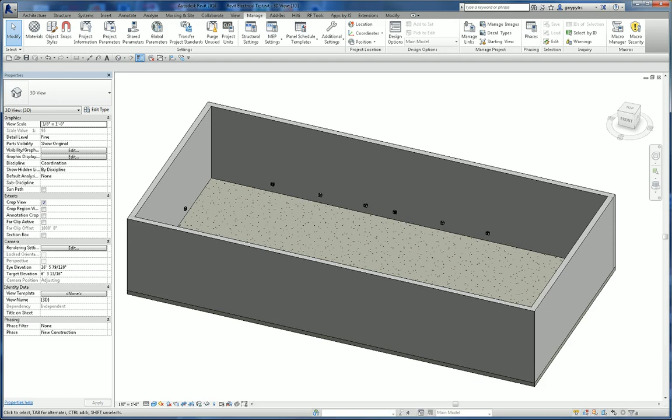We're in Revit 2014 investigating some issues with the electrical wiring. What we have here is basic 4 walls and a floor with a few outlets. Here we can see that this is an L630R, which is a 208 outlet, and here is a quadplex, which is a 120 volt outlet.

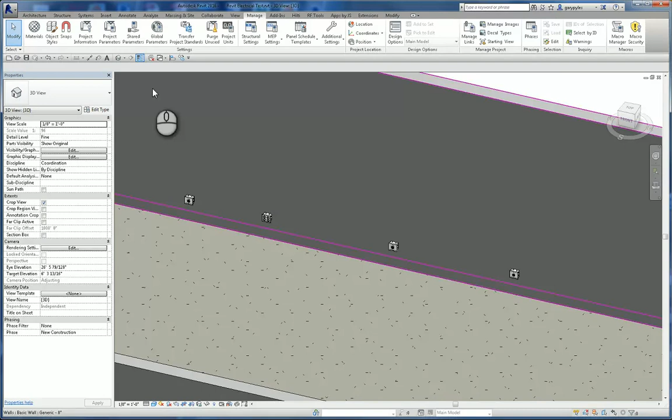Let's look at these in a plan view. So here we can see a bunch of outlets on the wall. Again, there's our L630R, a couple of them, and then our quadplex. We also have a panel already installed with the distribution system, PP1.

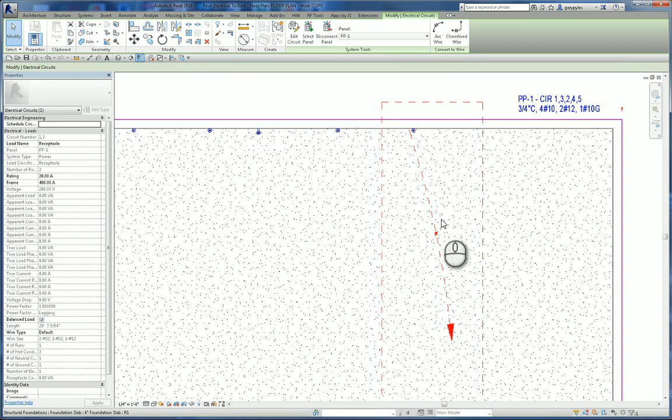So the first thing we're going to do is from this outlet generate a circuit. And one of the problems we can see right off the bat is, for some reason, this outlet does not have the right voltage amperage to it.

So we basically just have to tab on this till we get the circuit, and then we can change the rating over here from 20 to 30. This is important because it's going to change the wire size as well. You can see everything went to number 10s here.

The one thing is, you can see right here in the wire size, which gets picked up by the label, that it's added a neutral, even though this is a balanced load and it doesn't require a neutral. And this is where the big issue comes in.

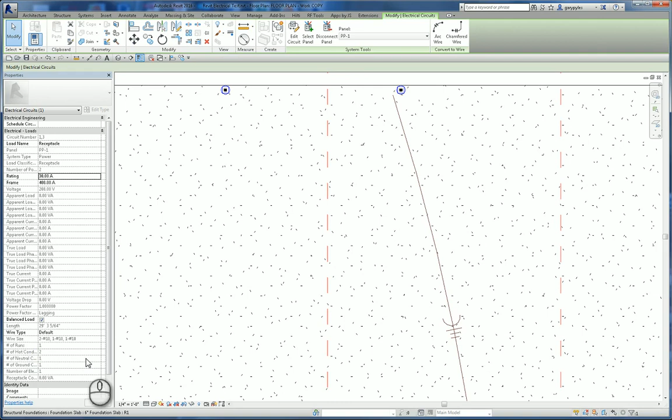Maybe if we come back into here and just select the electrical wire itself, I can adjust the number of neutrals in there and get it down to 0.

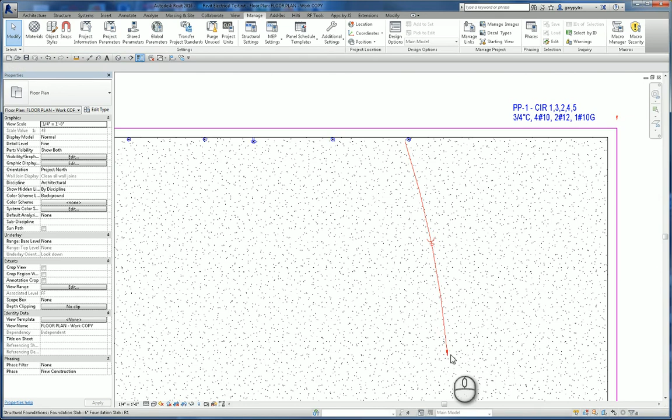So that's actually a fix to one of the problems that I was having. And here we can see that it puts in the home run arrow, which works out. Not sure why these whips never really connect where you want them to. I'm not sure if there's a way to correct that or not.

So here we have a single circuit, which seems to be working out okay, and we'll go ahead and tag that. I've got a free end here, so I'm going to do that and drag it off.

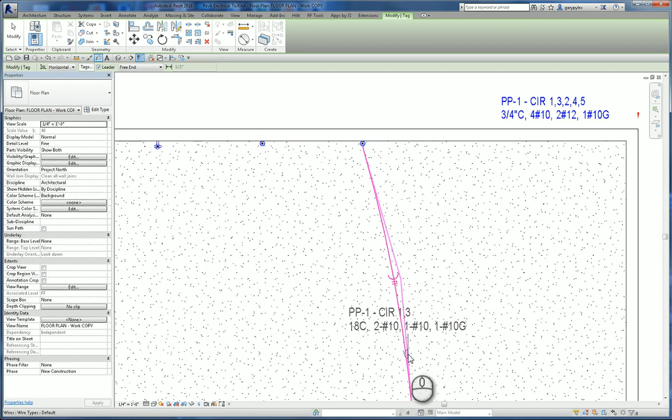This is a custom electrical tag that I built. If we want to look at it, let's go into edit the family real quick, select it, and edit the label. So at first we can see it picks up the panel name, puts a dash in, and then the circuit numbers, which it pulls out, and it's basically the same information that's carried over from the circuit into the panel schedules. We get a break to a next line.

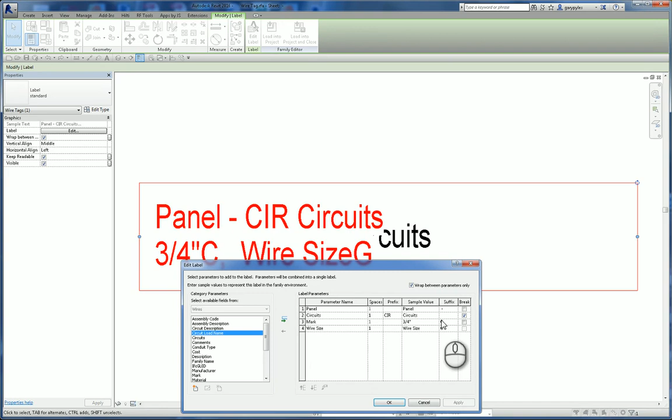Then this mark, we use this to actually control entering the size of the conduit, and I'll show you where that gets entered in a second. The letter C for conduit and a comma, and then lastly the wire size that it picks up right out of the wire size. And since the last entry is always the ground, we put a G on there for the ground. We'll go ahead and close that without any changes.

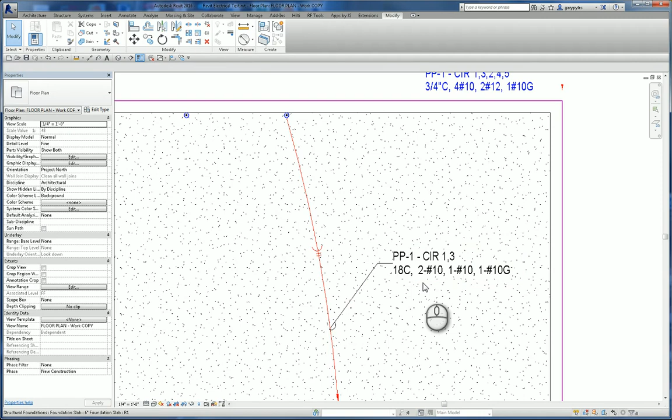And we're back in. So you can see how it's picked this up here. Power panel 1, circuits 1 and 3, which this does require 2 breaker positions, a double breaker. 18C, so we're going to click on there and then go over to the mark and change that to 3/4 inch, and boom, so now it goes back to 3/4 inch conduit.

So here we have 2 number 10 hots, 1 number 10 neutral, and 1 number 10 ground. Well, that's not right. We just told it that there's not 1 number 10 neutral. Here it's showing up that it is 1 number 10 ground here, or that there's 1 number 10 neutral in here. But up here, where we've just dialed it down to 0, it's not affecting this. Not sure why.

Oh, what about if I put that up to 4? Now that increases that. We can increase or decrease that to less than 0, but it doesn't change.

So let's look at the MEP settings. Go into Manage, MEP Settings, Electrical Settings, go over to Wiring, down to Wiring Types, and then we'll click Neutral Required, check it off, and say OK.

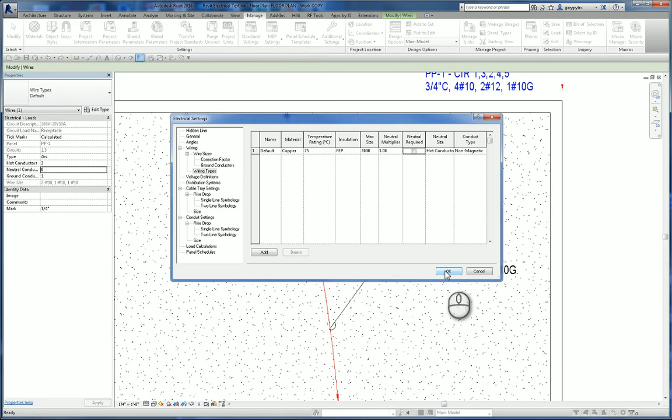So now our wiring has gotten really screwy. Let's check to see what happens here again. It just says 2 number 10s. Well, we know that's not right either. The tick marks are right. That's not. It says neutral conductors -1, which I find interesting.

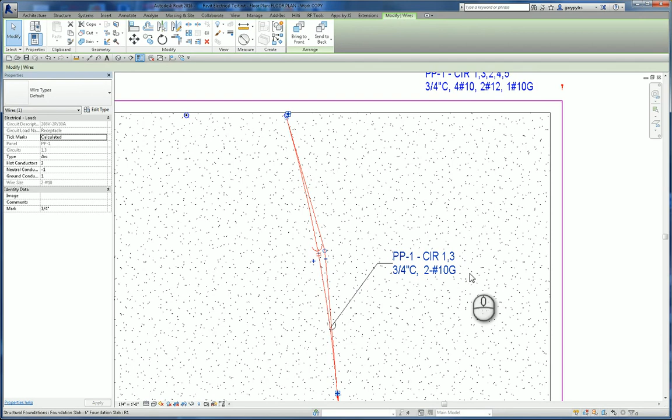It does say a ground conductor is there. And then we've got 2 hots. So how this is displaying is just 2 dash number 10, which makes no sense whatsoever. So it's stayed with the ground, but didn't put in our wire size here. And again, that was just from going to MEP settings, electrical settings, neutral required.

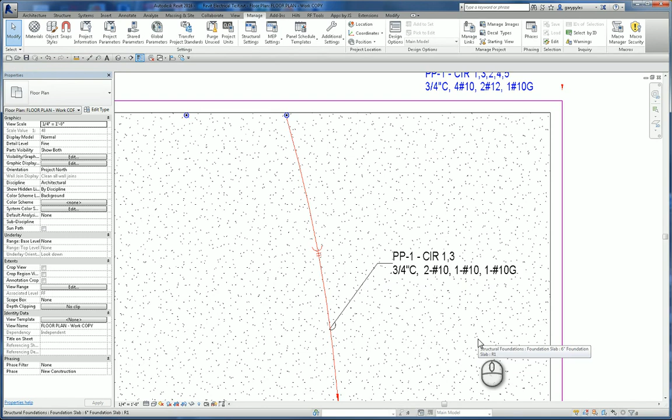Go back and check again. We can see here, this is actually the correct wiring structure. This is not. This is not reporting what is shown there. This is reporting what's shown there in wire size, but it's not correct. That's issue 1. Now let's look at issue 2.

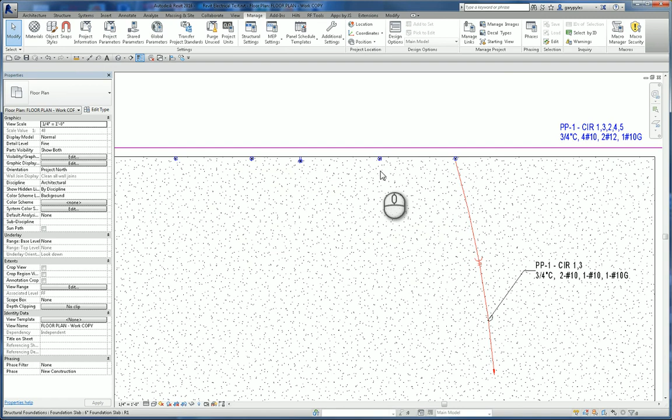So we click on another outlet, and then we're going to add another circuit. Make sure we add its home run first. Again, this is one of those that we're going to have to change the voltage on. So highlight the outlet till we get the box. We're going to change the circuit value to 30 in there. Can't change the wires down here, even though it gives us 1 number 10 neutral, no ability to change it.

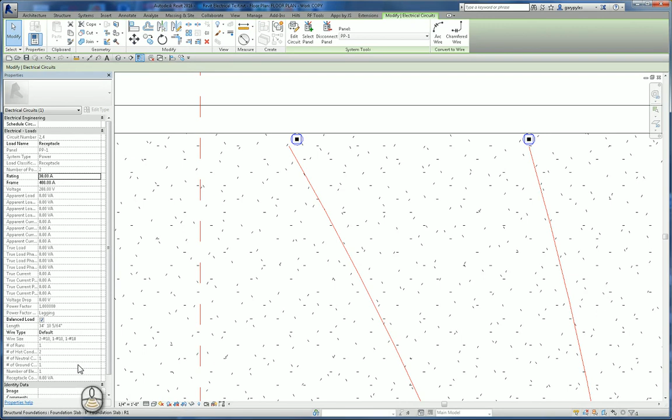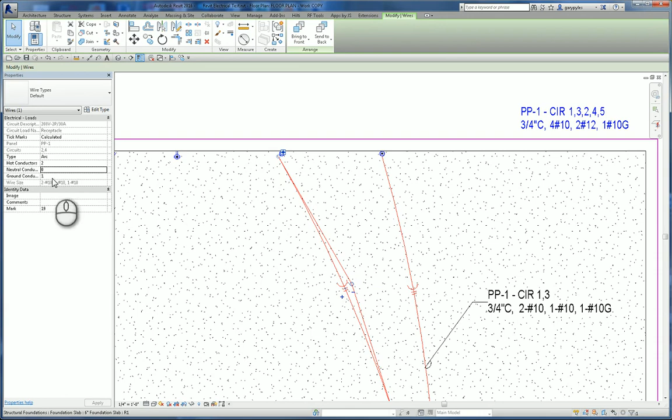So there it is. Hey, there's that silly neutral again. Why do we have it? Go over here and see if I can get rid of it, down to 0. Tick mark works, but again, the reporting does not. So visually it's correct, but the reporting part is not correct. It's not getting that information.

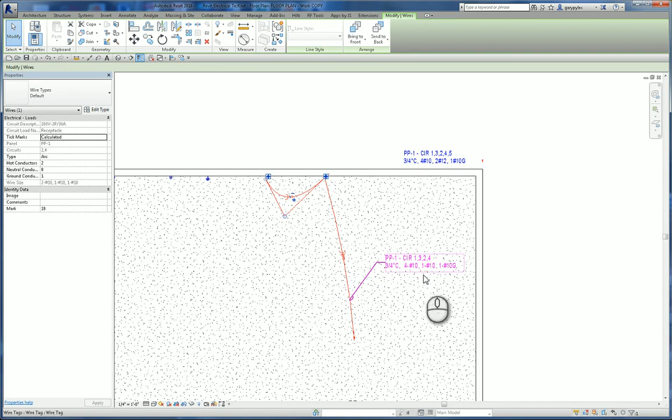So now I'm going to grab this and we're going to connect this circuit to use the other line for its conduit. So we can see it connects here. It updates the 4 number 10s, which is correct, and then the number 10 ground, but we don't need, again, that number 10 neutral. And we can see in here what happened. It picked up the neutral again.

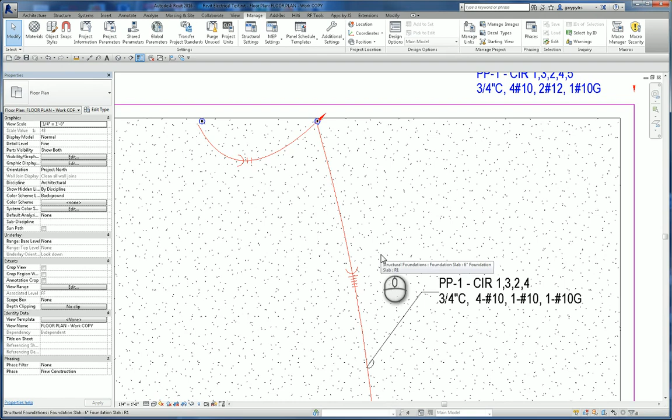So even if I go back in here, I can't get rid of that because it's a calculated value. I don't know if I change this just to on and then try to run that down. Can't do it. So again, kind of an issue there. The other issue here is this, hold on a minute, there we go.

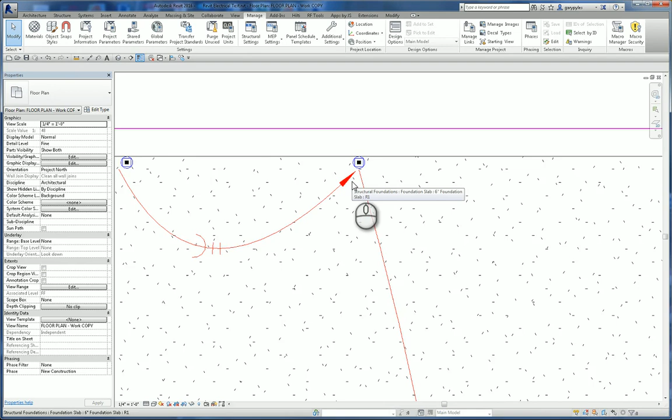This silly home run arrow here. Once this gets connected and it shows correctly that this is a double home run, there should be no arrowhead here. That just needs to go away. It's ridiculous. Again, we're not quite connecting at the right spot. I'd love to know if there's a fix to doing that when you design these families of outlets. So there's part of our issue there again.

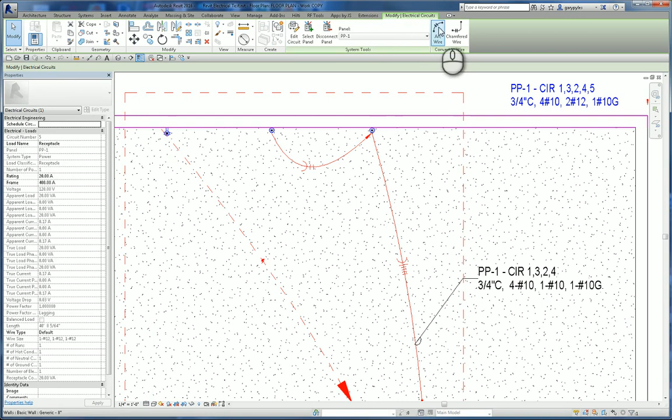Now, what I'm going to do is I'm going to connect one more. I'm going to connect one of these 120s. So again, I'm going to generate a circuit. And I'm going to bring this around and connect it in there. So I'm going to pull that out.

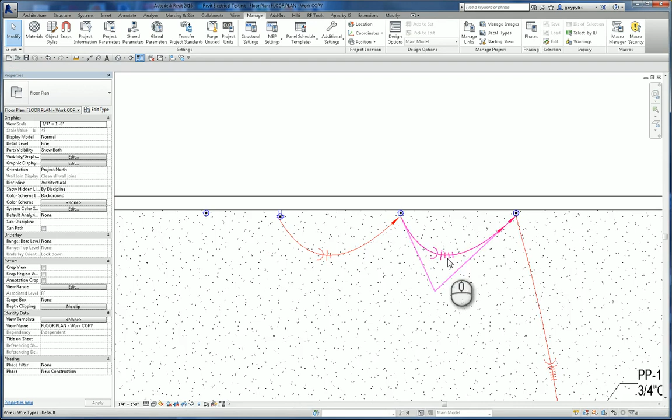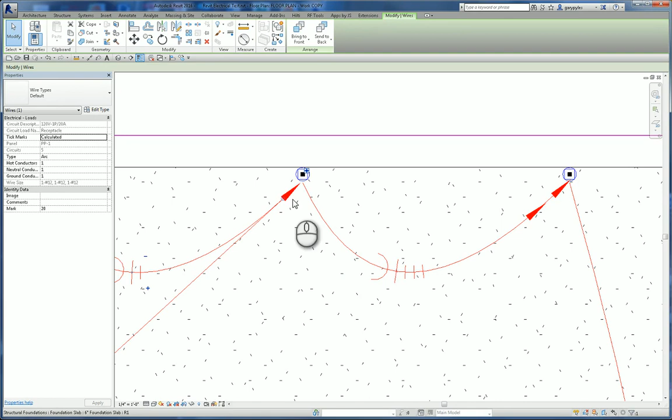So here now we see that we have in this circuit one number 12 hot, one number 12 neutral, and one number 12 ground, which is correct. And then that's got to get passed through here and then over here, so we're running through the same conduit. Here's our silly home run arrowhead, and we added two more over there. This one is finally correct.

Let's look back at our tag. So the 3/4 inch conduit was still right. Picked up the circuits 1, 3, 2, 4, and 5. That's correct as well. 4 number 10s is correct. 1 number 12 is not correct.

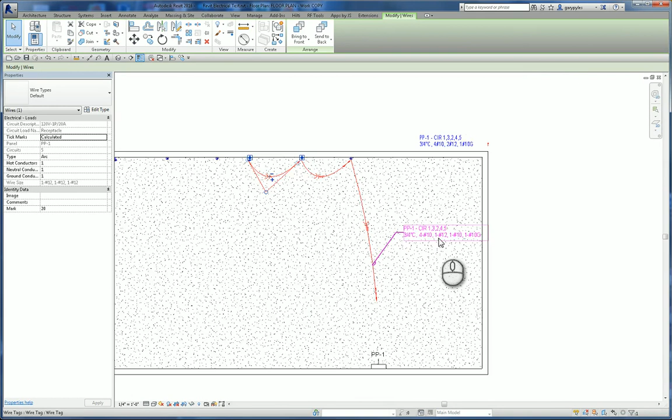Because if we go back over to here, there's 2 number 12s here. And then we have another number 10 neutral, which is not correct. And then we've got 1 number 10 ground, which is correct. So here is the way that it should read. I hope that helps explain what's going on.